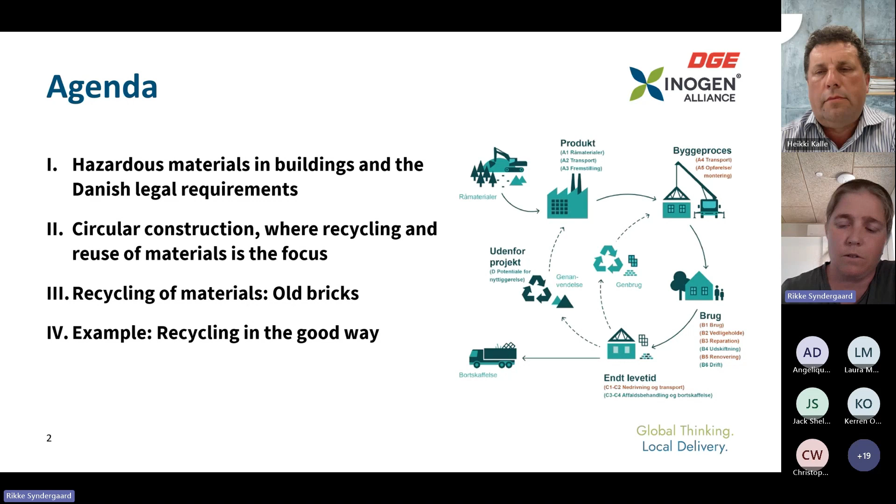Here in Denmark, in my personal opinion, and from what I hear from colleagues in other countries, Denmark is pretty good, up in front, in the investigation of hazardous materials. For normal projects, we check for PCB, 8 heavy metals, asbestos, PAH, hydrocarbons, and other substances in every project we have.

And along the way, we see that PFAS is a subject moving around in all the other areas we work with. We know it's there in the water along the Danish coastlines, and we know it's in the ground, but we also know it's in our building materials. So it's just a matter of time before we also start checking for that. My personal opinion is that we're just waiting for the Danish authorities to set limit values for PFAS so we can start checking it and put it into our reports.

Here in just 2023, we've experienced a really big focus on asbestos in our projects, because some people find asbestos in hidden materials, but also some people handle it quite wrong. When you handle it wrong, asbestos gets spread all around in the buildings and areas. It's a bad thing, because in the end, if you handle it wrong, you can die from breathing it in. But if you handle it right and get rid of it properly, asbestos isn't as big a problem as it could be.

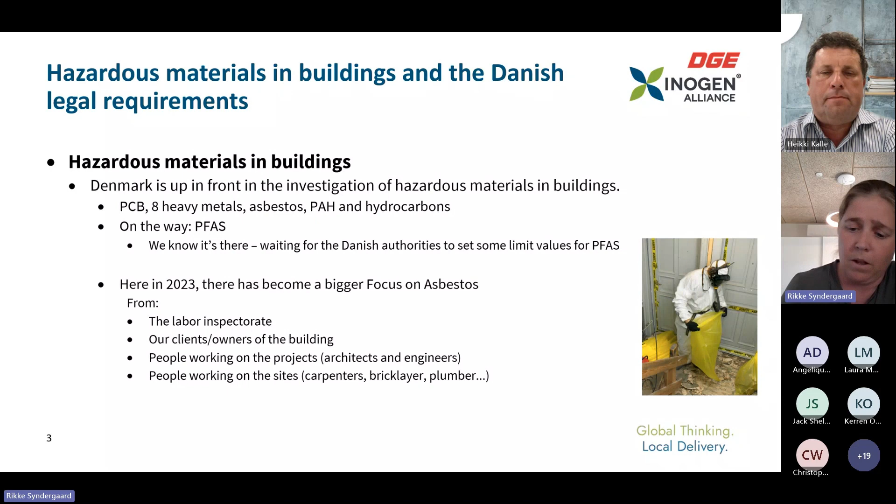Talking about Danish legal requirements, right now there's no direct legal requirements for circular constructions, which we're jumping over to now. But this year, the building regulations have set demands for carbon dioxide emissions calculations, where the demands set will increase the focus on recycling building materials in upcoming constructions and buildings. So there's no demand in legal requirements for reusing buildings, but because of trying to reduce carbon dioxide emissions, that will increase the demands for recycling materials. So one thing leads to the other, and hopefully that will end up being a good thing here in Denmark.

Right now we have ongoing research about reusing concrete, where people are researching, trying to crush down the old concrete and put it into new concrete, showing that it can be as good as new concrete made with raw materials from gravel pits.

People are making this research not only because we'd like to reuse concrete, but because it's a big need here in Denmark, since studies show that the Danish gravel pits will be empty of raw materials within the next 5 to 30 years, and the gravel pit nearest to Denmark's biggest city will be emptied first. So in 5 years' time, they're saying the gravel pits on the biggest island in Denmark will be emptied of raw materials. And that's a really bad thing.

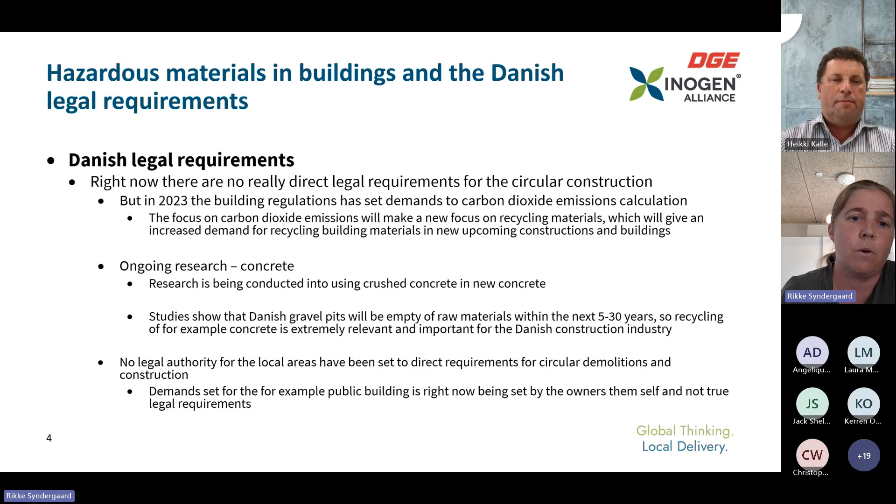So the owner makes the people bidding on projects describe what they're doing, for example with circular demolitions and how they're recycling materials. The better descriptions they make for the problems, the bigger score of points they get. So it's no longer just the price that matters, but also how they're reusing the materials.

Also here in Denmark, and I'm guessing you have this in other countries too, we have the DGNB building systems. It's a big topic in Denmark now, because it requires you to recycle and reuse a lot of materials—the more the better.

But you also have to make sure you don't drive too far away with your materials. For example, in DGNB buildings, there are demands that you're not allowed to drive more than 50 kilometers away with any waste. In big cities that's not a problem, but when you go out to the country, you really have to think about that, because suddenly 50 kilometers isn't such a big distance.

Also in the DGNB systems, they make sure buildings are controlled for example for PCB, heavy metals, and asbestos. The people checking for that have to be a third party—it can't be the building owners themselves or anybody involved in the project. There has to be somebody who doesn't have an active role in building it or in making that project.

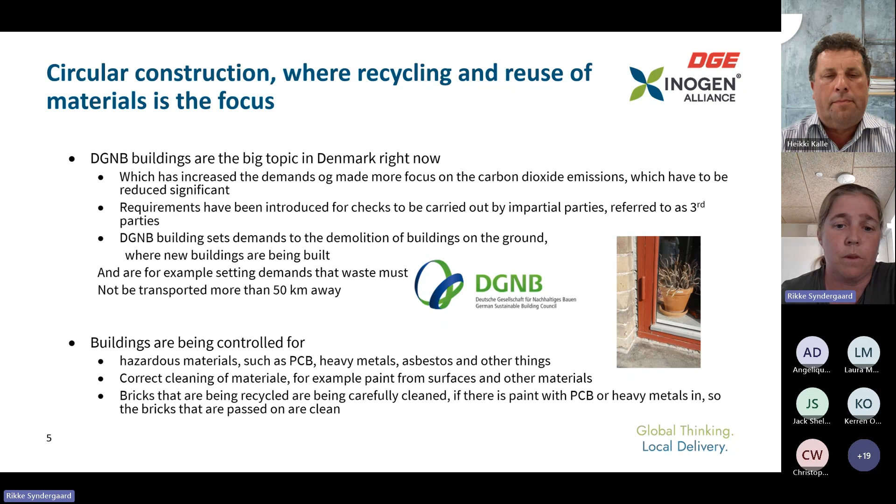Also in those projects, they try to recycle bricks if possible, and as far as possible we'd like to reuse things in the projects. If it's not possible in the correct project, you could reuse it in some other project. The more you reuse, the higher score of points you get, and in the end you can call your DGNB building a gold building or diamond building and stuff like that. That's good PR for the building owners, but also good for energy and health in the buildings.

Here in Denmark, we see a bit of a problem with recycling materials, where architects and engineers would like documentation on the durability of the materials, which can sometimes be difficult to present. Right now, CE labels exist for old bricks, so we can show documentation on those, but not yet on other materials. I know people are working on that, as well as on crushed concrete, because we need documentation so we can reuse it in new concrete and make sure it's good to put under our new buildings, so it lasts as long as possible.

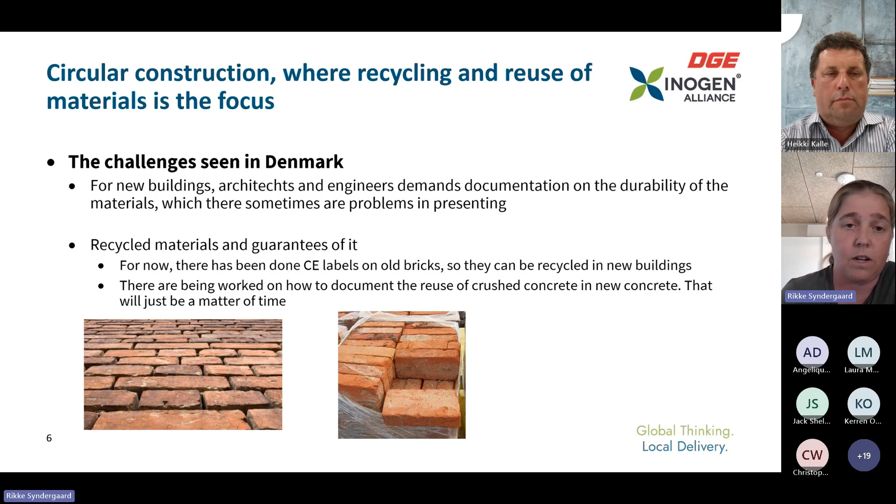Here in Denmark, we are really good at reusing old bricks, and we've been doing that for many years. People know it's possible to get old bricks and put them into new buildings. Also, in Denmark, new and old bricks often have the same size, so it's not a problem to use them in new buildings.

But before you reuse them, you have to make sure they're clean of PCBs and heavy metals that can be in the paint. As long as the bricks are clean, or are cleaned so there's no paint left on them, you can reuse them in the next building.

We've also recently started importing old German bricks to Denmark, which we use for outdoor material like flooring, walls, and similar things. I'm not sure if we only use it outdoors because of the German size being different from the Danish size, or because it's not suitable for indoor use, but I'm guessing it's just a size problem, since it can still be built into new buildings.

Then from the bricks, we also have a small island here in Denmark named Bornholm, where they've been recycling roof tiles for more than 20 years, which is tied to Bornholm's architecture. So when you take down an old building or roof, you have to make sure with the local authority that you take down all the small roof tiles, and the good ones you set aside so you can put them up on your own roof or someone else's.

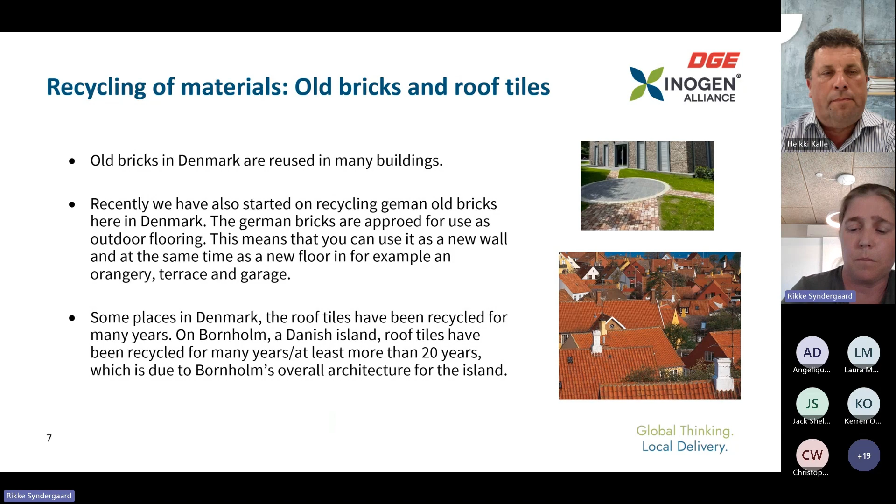Then we're going to go through some examples.

We've had projects here in Denmark where there was a mission house going for demolition, and all the bricks from that building were taken down carefully and cleaned off, then brought to another building in the local area where they had to build a new pub.

For the Danish humor, and there aren't so many Danish people here today, but the Danish humor is that it's funny, because in the mission house you don't drink, but in the pub you drink a lot.

The other good story is that it's good for health and the environment, because for every brick you reuse, you save half a kilo of carbon dioxide emissions. Also, the other bricks have been CE labeled, so you can document that they are almost as good as the new bricks you can buy in shops.

I'm guessing the next thing we'll see is that we'll try to recycle all the roof tiles that have no problems with them, taking them down carefully and putting them up on new houses.

But of course, you always have to be sure there's no hazardous materials in it.

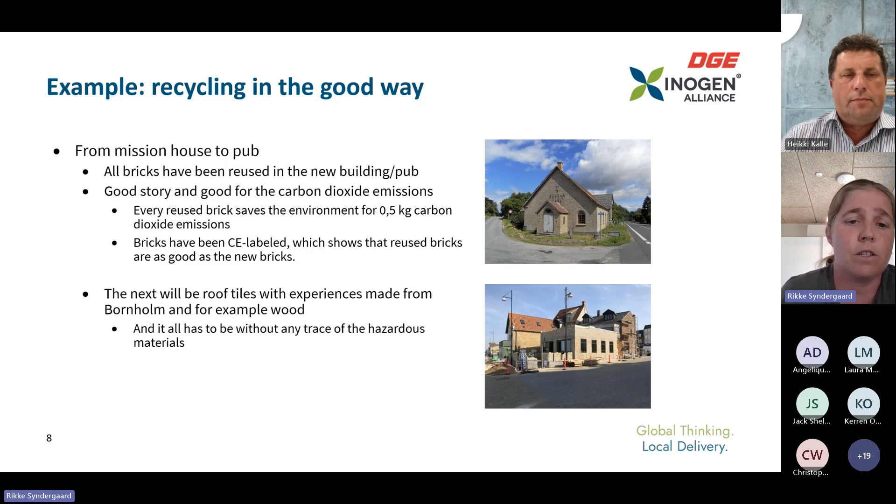The last example is from my local working area in Aarhus, the second biggest city in Denmark, where we had a hospital where we had to take down all the old bricks. They were transported to another local area where they had to build a new school, and around 400,000 bricks were recycled from the old hospital into the new school, saving over 200 tons of carbon dioxide. It's a good story to tell the small students in the school, but also good for showing that you can recycle materials and put them into new things, making sure you don't have to drive so far, as long as you get it into the projects in an early phase.

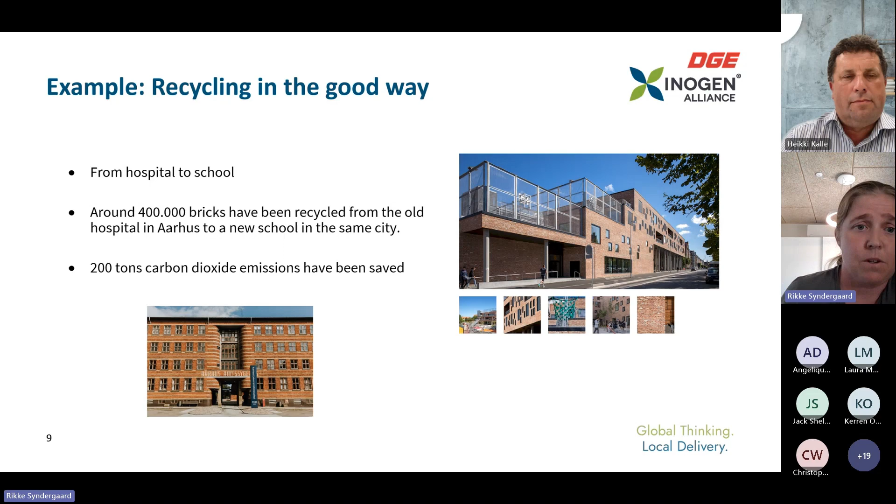That was the quick tour from here, and you're welcome to put questions in the end.

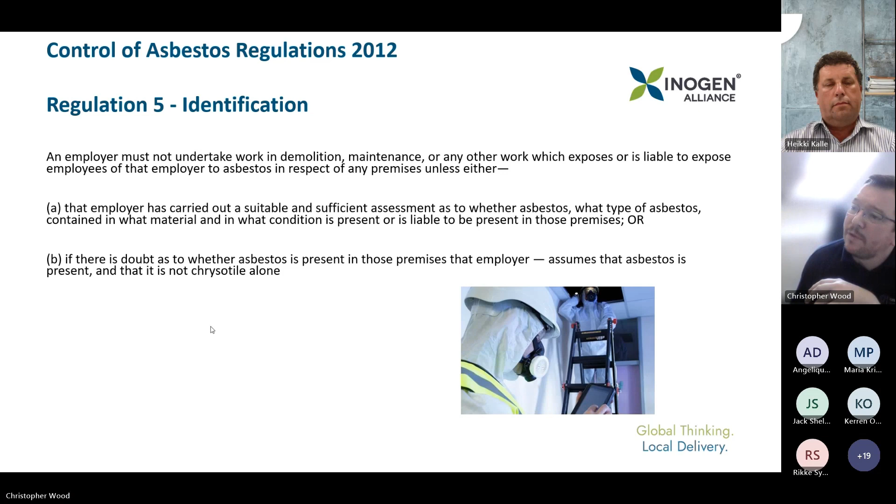So if we have asbestos and we identify asbestos, there is also a regulation, Regulation 16, that says we have a duty to prevent or reduce the spread of asbestos. So if you have asbestos within a building and you don't remove it and you just demolish that building, you will ultimately be spreading asbestos and in breach of this regulation, so we will be breaking the law. So what the law says here is that we need to prevent or reduce the spread. So the easiest way to do that is remove the asbestos prior to demolishing your building. If we remove the asbestos first, we're going to avoid spreading asbestos.

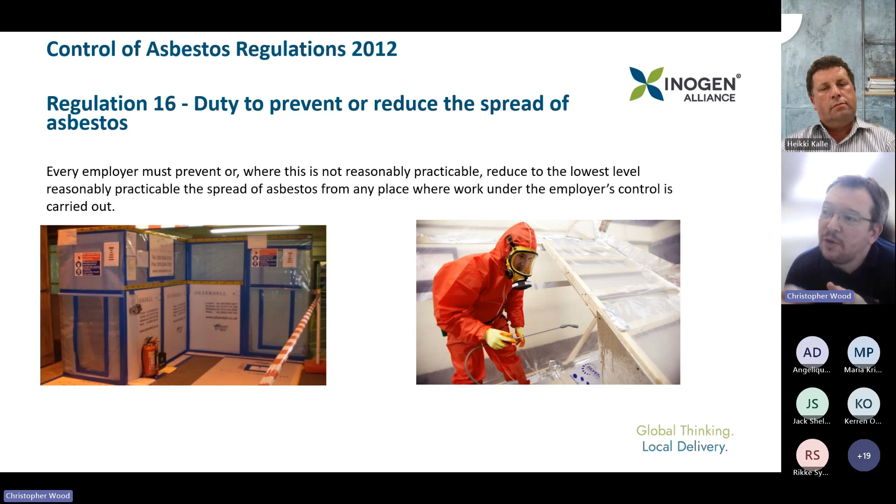That's in terms of very briefly on the control of asbestos regulations. I could talk about that all day, but we've only got a short window to talk about it here.

In terms of environmental and waste regulations, here in the UK we classify waste containing asbestos as hazardous waste if it has more than 0.1% asbestos within it. That 0.1%, however, relates to the asbestos within a piece of material. If that piece of material, let's say a piece of asbestos cement the size of my thumb with about 10% asbestos content, was in the back of a lorry full of crushed brick and concrete, that entire load would be classified as hazardous waste because you're unable to dilute it down. So until that piece was removed, the whole load would be classified as hazardous waste.

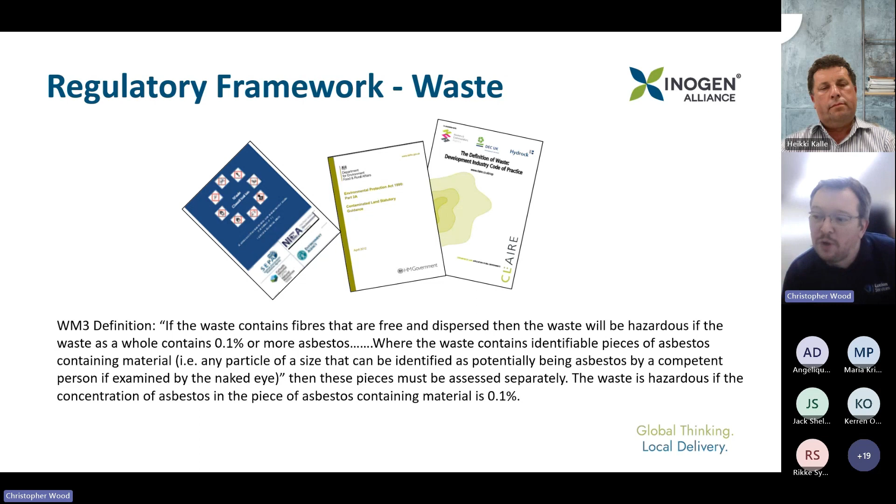In terms of what we could do with waste, particularly hazardous waste, we should follow this hierarchy. The number one thing we should be thinking about is trying to avoid having any waste whatsoever. But if we're going to demolish a building, we're ultimately going to have some waste. We can't change what we're doing, so we need to do something with it. If we can prepare it for reuse - checking and cleaning - so if we can clean it by removing the asbestos, then the remaining material may be able to be reused.

In terms of asbestos, we can't reuse it in the UK, and we can't recycle it or use it in any other way. Once it's reached the end of its life in a building and been removed, it has to be disposed of. Whilst there are some techniques to try and make it inert, pretty much 99.9% of all asbestos will ultimately end up being disposed of to hazardous waste landfill sites. So it is going to landfill, but with these asbestos materials, there isn't a great deal we can do with them at the moment.

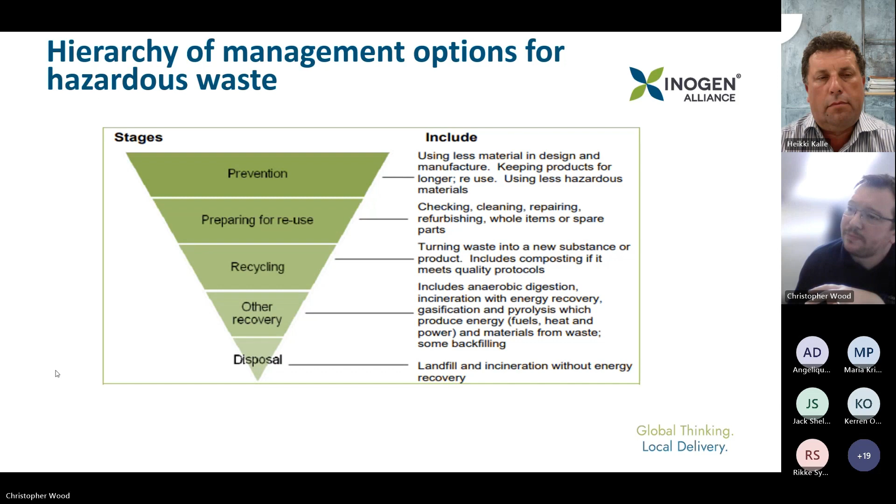You can't water it down with the rest of it. So if they were to remove all this as one big load, the entire load would be classified as hazardous waste. Therefore, it's going to get expensive to deal with because we can't reuse it - we're ultimately going to have to dispose of it to a specialist landfill site, potentially.

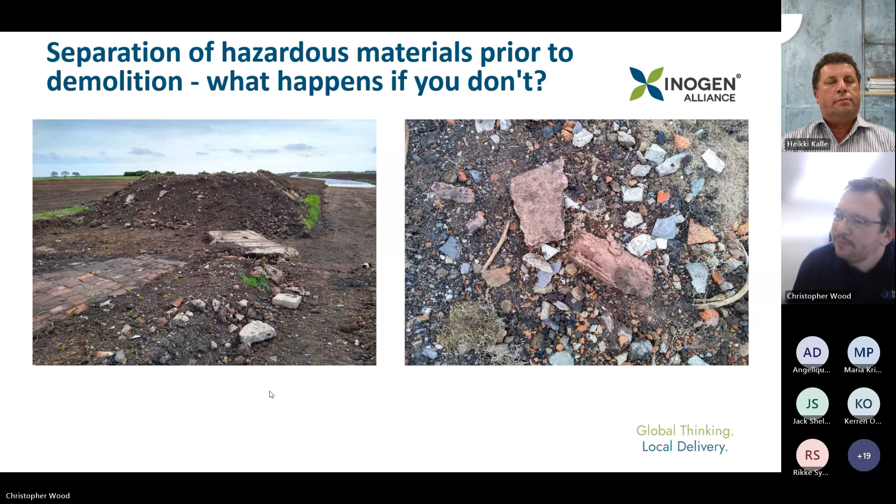We could try, if we have asbestos mixed in, to do a pick and separate it out. There are various techniques - on a small scale it may be practicable, but at large scale it just may not be practical to do so. That's where the entire load may end up going, or we may need to come up with a system to somehow retain it on site. Either way, we're into quite a lot of money here, whereas if it had been removed first it would have been easier. Once it's gone through a crusher, it's very hard to start trying to separate it.

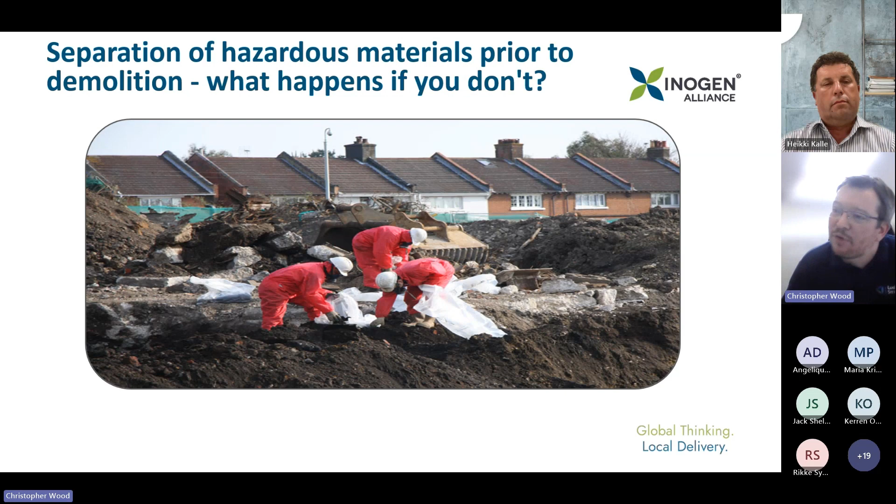Just a couple of examples of where it went wrong and where there's some good practice. The first one - a demolition project up in the northeast of England. On this project there was an in-ground obstruction, a concrete slab that the demolition contractor was breaking out and removing. They broke out this concrete slab, crushed it, and it was then spread around the site. Later down the line, somebody spotted some suspicious material on the ground, which was sampled and identified as asbestos. Lucion then did some more sampling regimes and determined that this was quite spread around the site. As part of the investigation process, it was basically assumed that this concrete they'd broken out had asbestos shuttering within it, but it wasn't identified at the time - only after it had been broken out, crushed, and spread over the site.

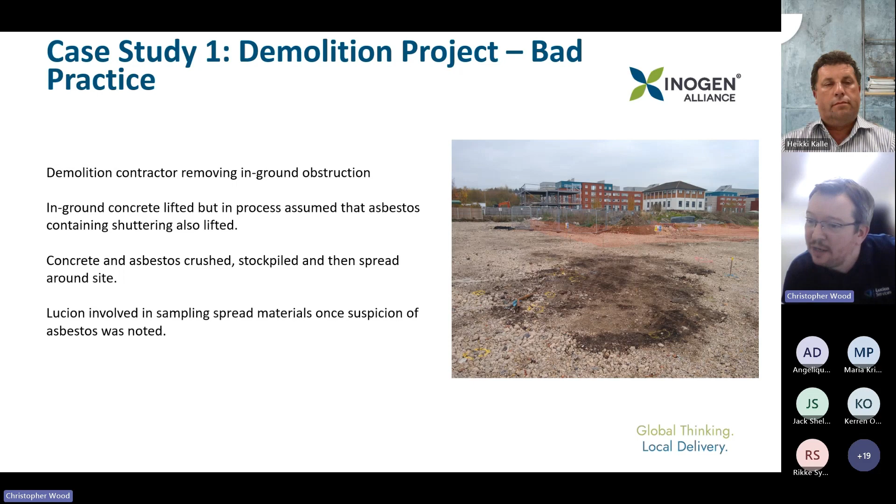Because it means spread, all the inert aggregates were now classified potentially as hazardous materials. So to start removing all this, if we can't separate it out, we're into millions and millions of pounds. So Delta-Simons were involved with coming up with a solution to try and avoid removing the material and retaining it on site, because you don't have to by default to start removing it all.

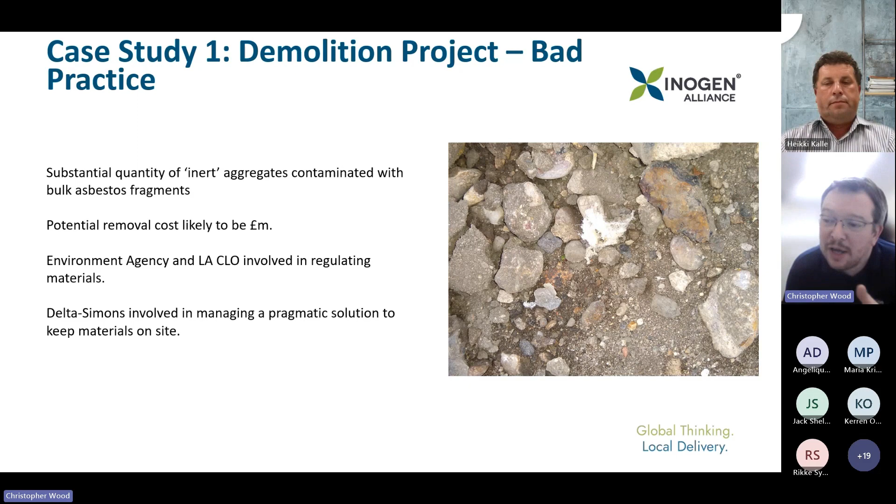We may be able to come up with a process to retain it, for example, keeping it on site and putting capping layers over the top. But that does involve a lot of liaison with our enforcement authorities, like our environment agencies and local authorities. So obviously it needs specialists to be able to come up with these ways of retaining it rather than spending all the money on disposing of it off site.

So in terms of the investigation, why it had gone wrong, well, ultimately the contractor carrying out the work didn't have adequate supervision in terms of breaking out this concrete. The staff on site actually had very limited knowledge of asbestos. It is a legal requirement in the UK under our asbestos regulations to provide information, instruction and training regarding asbestos if you were to potentially come across it as part of your working life in your job.

So these people hadn't had the required level of training. They also had very limited knowledge in terms of our quality protocols regarding aggregates being made from inert material having no asbestos within them, and also very limited knowledge generally regarding environmental regulations. So quite a key bit of this was just education for their staff in terms of asbestos knowledge, because had those contractors doing the initial breaking out had that knowledge of what asbestos looks like, then they may be able to stop at that point before they went too far and then ultimately spread it all over the site.

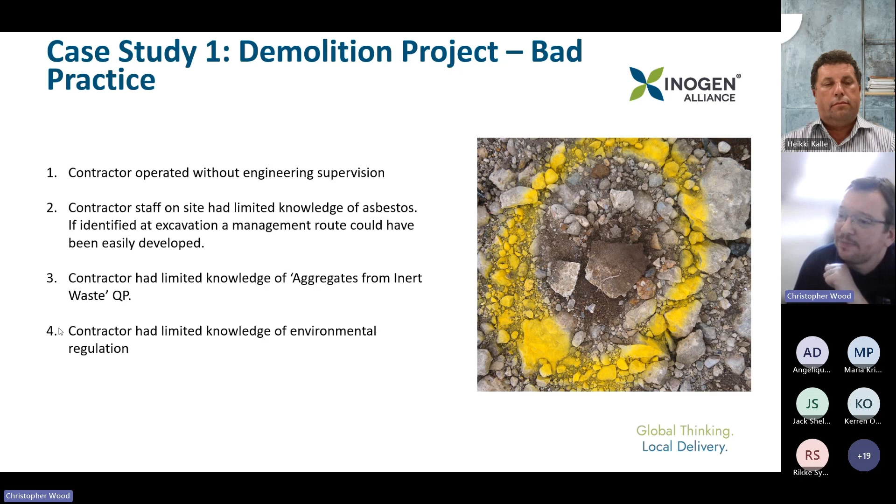That was a case of where it went wrong. Very briefly on some good practice on how it should be done correctly. So we have a project up here in the northwest of England this time.

So Lucion undertook a full demolition survey of this building. All asbestos which had been identified was then removed, and in this case it was removed by a licensed asbestos contractor. Again, that's another legal requirement in the UK. If you're working on high-risk asbestos materials that release a lot of asbestos fibres into the air, for example, spray coating, pipe laggings, fireproof boardings, insulation boards, those sort of things, then you need to hold a licence by the Enforcement Authority, the Health and Safety Executive, to work on those materials.

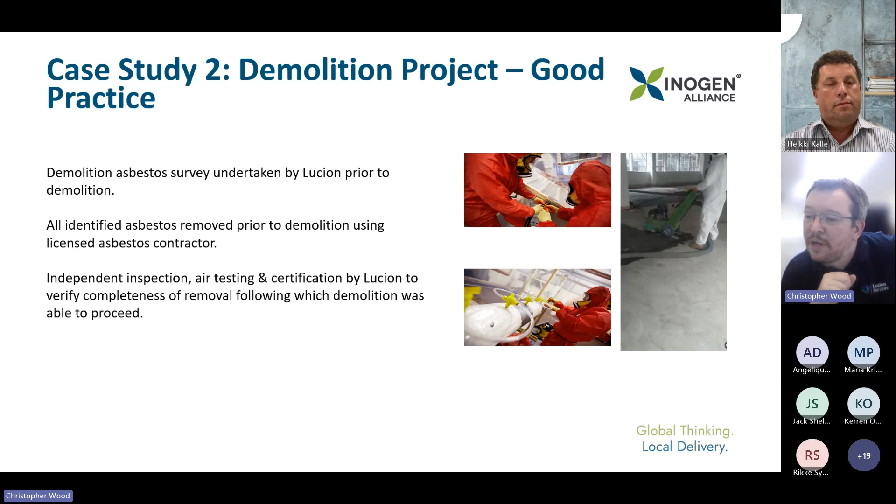And we also had some independent inspection carried out by Lucion. So separately from the asbestos contractor, we will do air tests and visual inspections and issue certification to verify that those areas are safe to reoccupy and to basically verify the completeness of the removal, that the asbestos had been removed. Therefore, demolition could proceed.

In this case, all the demolition operatives involved had undertaken asbestos awareness training. One of the key reasons why people do need asbestos awareness training, because even after a demolition asbestos survey, there still remains a residual risk. There may be some asbestos in the building that might not have been identified yet. Breaking out some concrete, then it may be uncovered. That may not be something that's uncovered in the survey. So education and awareness is really, really important.

The waste crushed material, the inert material, was tested for asbestos in accordance with its proposed use, in terms of whether it was going to be reused for aggregate, etc. So we kind of got a bad practice there where we've done it wrong. We've not identified it first, we've then spread it around the site. Whereas actually, if we do things correctly, we identify them, we separate it out prior to disturbance. We can then actually separate out the clean material from the hazardous material, and therefore avoid disposing of all of it as hazardous material.

So in terms of trying to promote some reuse, if we're making aggregate from inert crushed material, then we can't have asbestos in a product grade material. So we do already have quality protocols that state this. If people have got crushed material, it's much cheaper to be able to use it for aggregates than dispose of it as hazardous waste. So actually, if they spend the money removing asbestos first, they're not spending all that money disposing of all that what would have been inert material as asbestos waste. We don't always have to get rid of things.

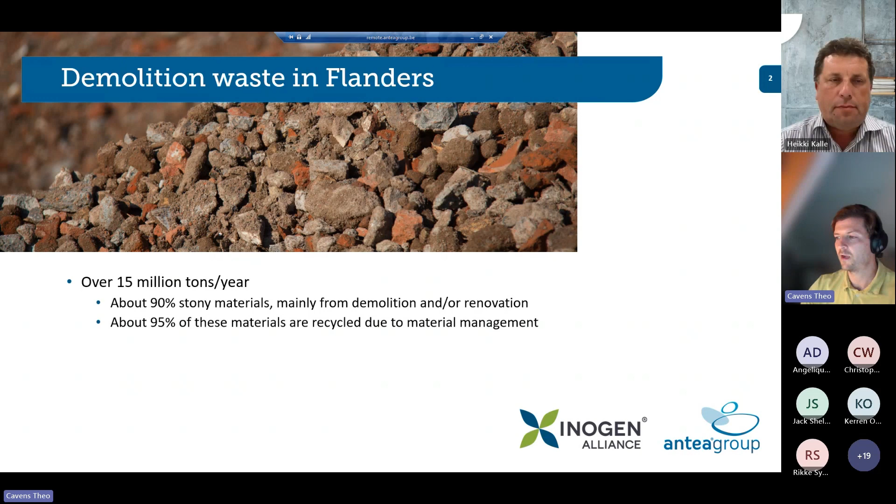Each year over 15 million tons of waste coming from demolition or renovation projects is produced, of which about 90% is stony materials, and about 95% of these materials are recycled due to material management.

But how did the material management and the current recycling process come to be? Well, it started off in approximately 1993 when the use of recycled granulates started.

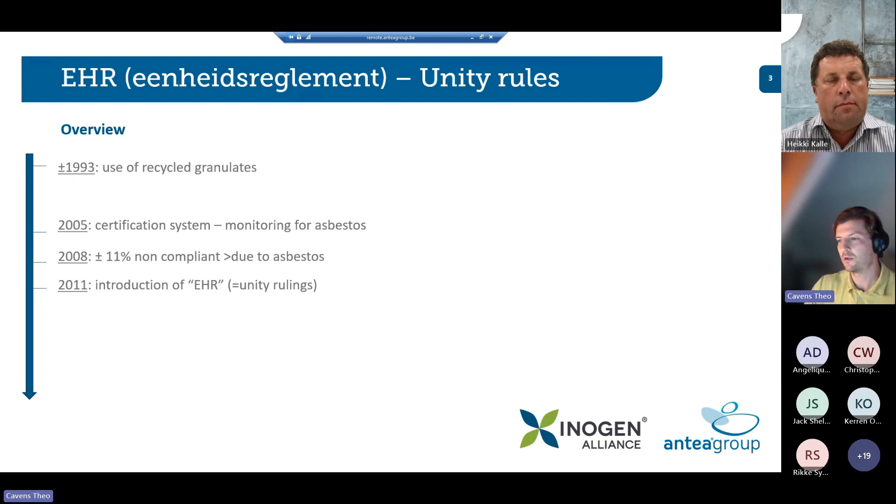In 2005, a certification system was introduced, mainly for monitoring asbestos. In 2008, a study showed that approximately 11% of the waste was non-compliant due to the presence of asbestos in the waste, which led to the introduction of EHR, a Flemish term standing for unity rulings.

Basically it comes down to certain requirements on the quality of granulates being included in the Flemish regulations on the reuse of materials. Because of this, the basic quality of granulates improved vastly, and it gained more trust to reuse recycled granulates as opposed to always reaching for new primary granulates.

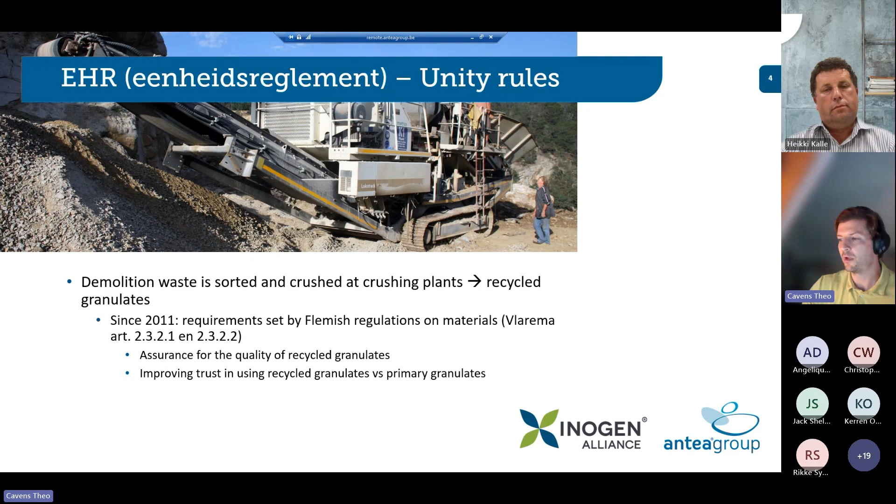A few years later, another study by OVAM, the Flemish Waste Authority, showed that 7% of the waste was still non-compliant due to asbestos. This led to a new approach of solving the problem at the source, which is done through the process of selective demolition.

Prior to demolition, all materials will be identified and inventoried, and during demolition, there's surveillance to ensure removal of waste happens in a correct manner.

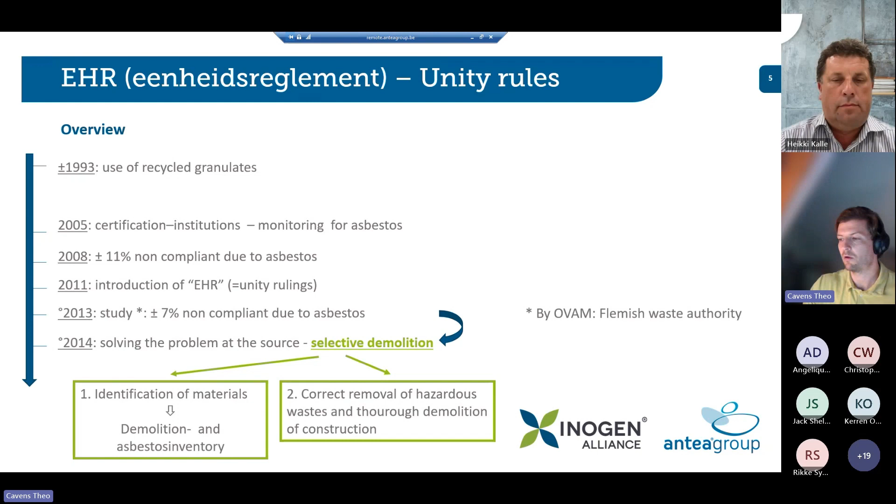With the process of selective demolition, two new concepts were introduced in Flanders: LMRP, which stands for Low Environmental Risk Stony Wastes, and HMRP, the High Environmental Risk Stony Wastes. The difference being the potential risk of the wastes on the environment.

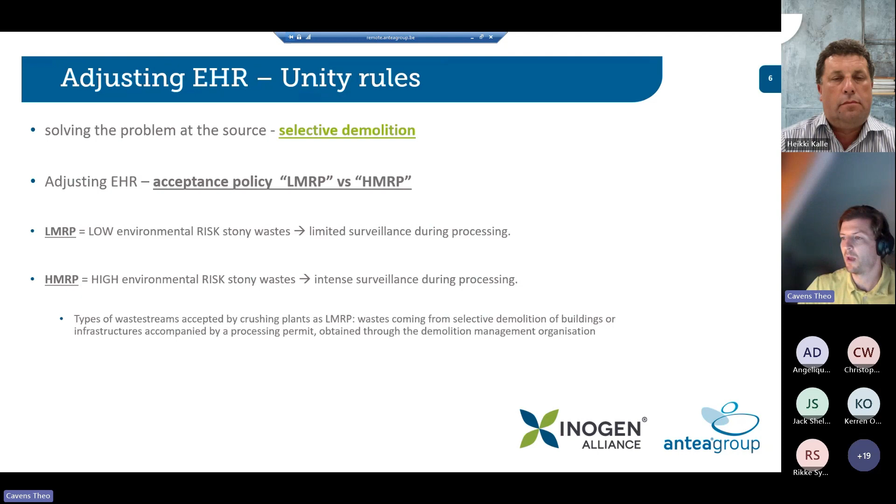Because the HMRP wastes have a higher potential risk, the processing cost at the crushing plant is much higher, as it's more closely followed. The LMRP label can only be obtained when the contractor is working in the correct manner, which I will explain in a minute.

To receive the LMRP label, the waste coming from a demolition project should be accompanied by a processing permit. This permit contains information on the type of waste, and through that, the crushing plant can decide whether the waste can be accepted as LMRP or HMRP.

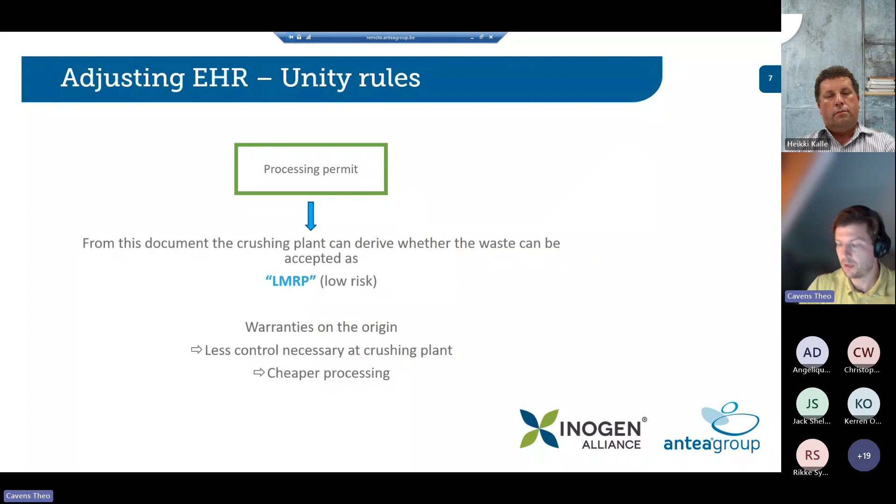To survey all of this, Tracimat was introduced in Flanders in 2014. Tracimat is essentially a demolition management organization, and its main task is to assure the quality of all the waste streams. They do that by surveying the SOP quality.

I will get to the SOP in a minute. This includes the correct removal of hazardous materials and the tracking of all materials. Through this procedure, they can guarantee higher quality input materials for crushing plants.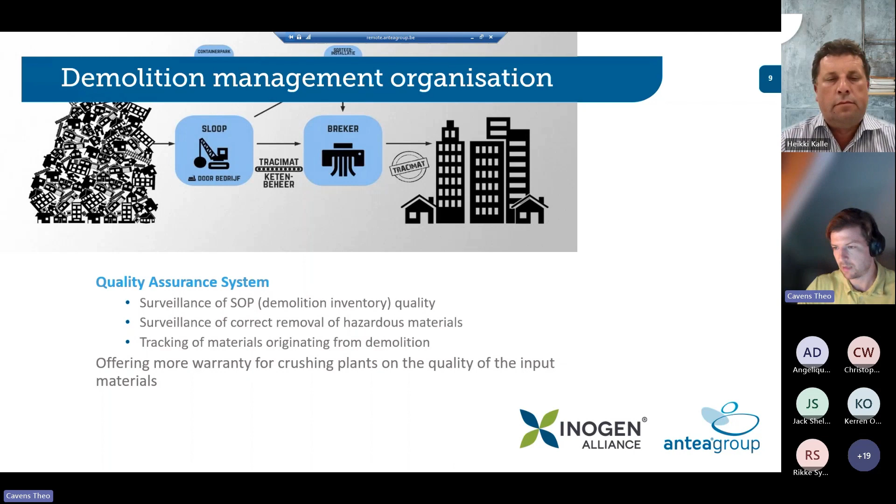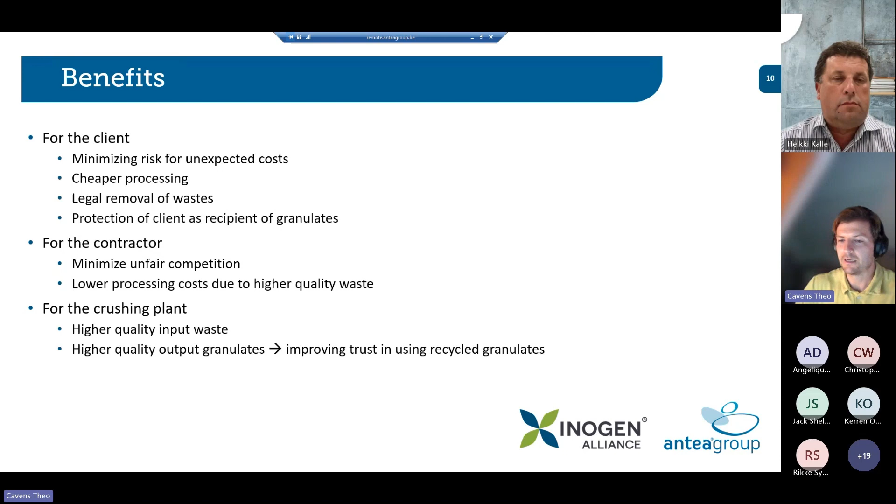This process has benefits for all of the stakeholders, mainly lower costs due to lower risk materials. Unexpected costs can be avoided, and there's a lower impact on the environment.

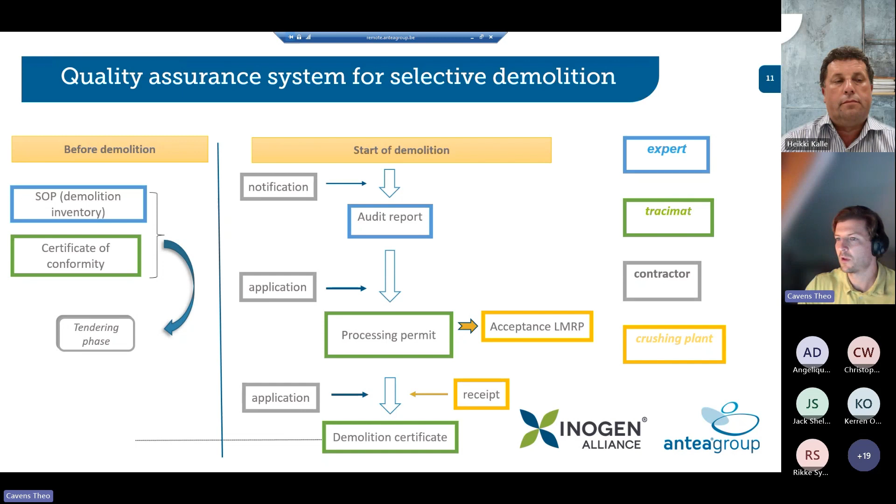Here you can see a brief recap of the whole process of selective demolition. A part of this process takes place before the actual demolition, shown on the left side of the blue line, and the other part takes place during or after the demolition works. The different colors in this scheme represent the different parties doing all the works. So first we'll take a look at the before-demolition part.

In the beginning, a SOP is made by an expert. The SOP expert is a neutral party, independent of the contractor. Most of the time, it's a consultancy agency. But what is a SOP?

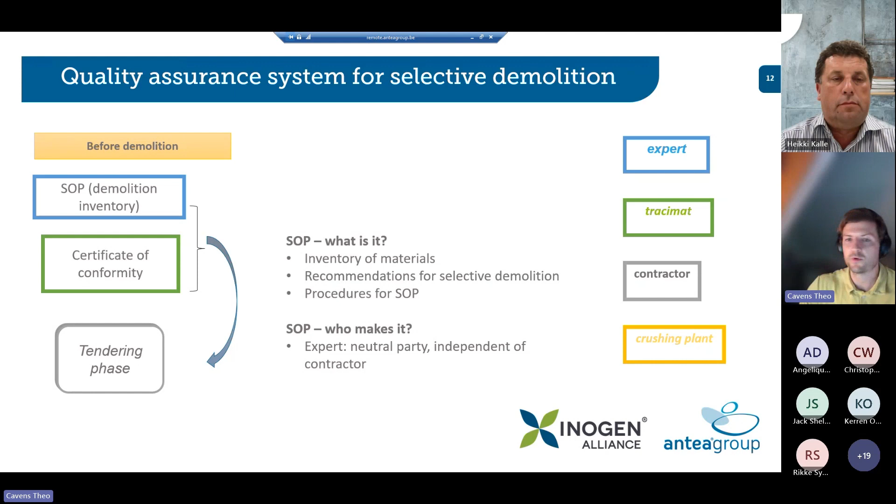It's a kind of report which contains an inventory of all materials expected to be released during the demolition of a building or structure. Also included are recommendations for selective demolitions. The expert needs to follow the standard procedures for making the SOP.

First, the inventory of all materials is a list of all types of materials that are expected. This means all types of materials, not just the hazardous ones, but also non-hazardous, from the substructures to the superstructures, and also the infrastructure.

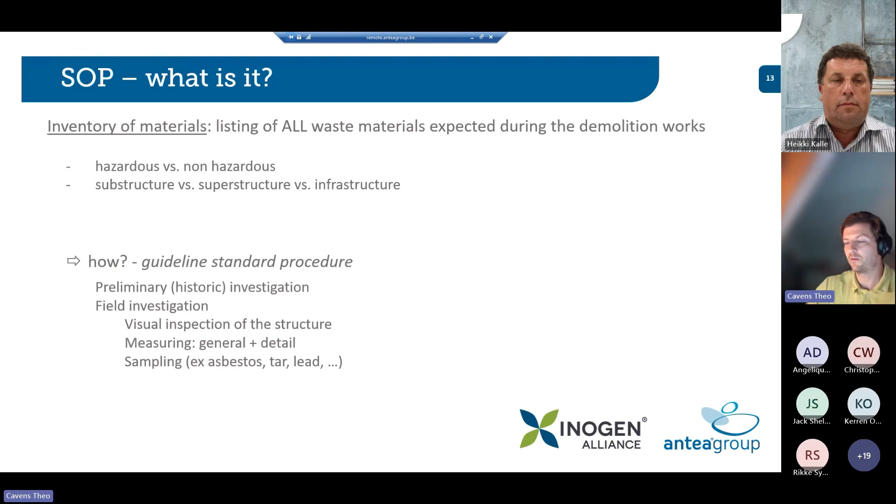The guidelines described in the standard procedure made by Tracimat should be followed. This contains a preliminary historic investigation, but also a field investigation with visual inspection of the structures, measuring of all the different materials, and the sampling of potentially hazardous materials.

The recommendations made in the SOP can be very general, but can also be quite site-specific. Some examples are the mandatory separation of different fractions of waste, but can also be removal techniques for asbestos or other hazardous materials, and

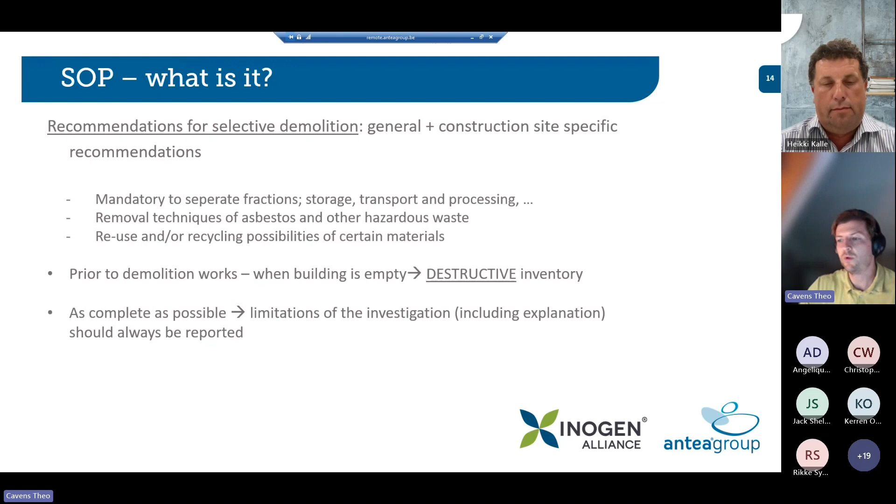certain recycling possibilities. As I said earlier, the SOP is made prior to demolition works and should be done as complete as possible. Any limitations on the investigation, closed rooms for example, should always be reported and explained.

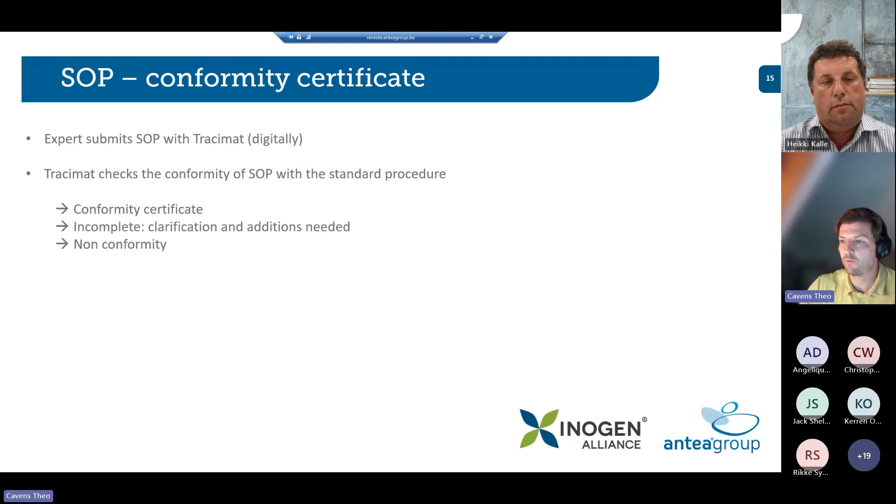When the SOP is finished, it's submitted with Tracimat. They check the conformity of the SOP with the standard procedures. And when they agree with the information, you get a conformity certificate from Tracimat, and the demolition works may begin.

Then the start of the demolition begins, and the contractor has to make sure that prior to the non-hazardous materials, all the asbestos and other potentially dangerous materials should be removed first and in a correct manner.

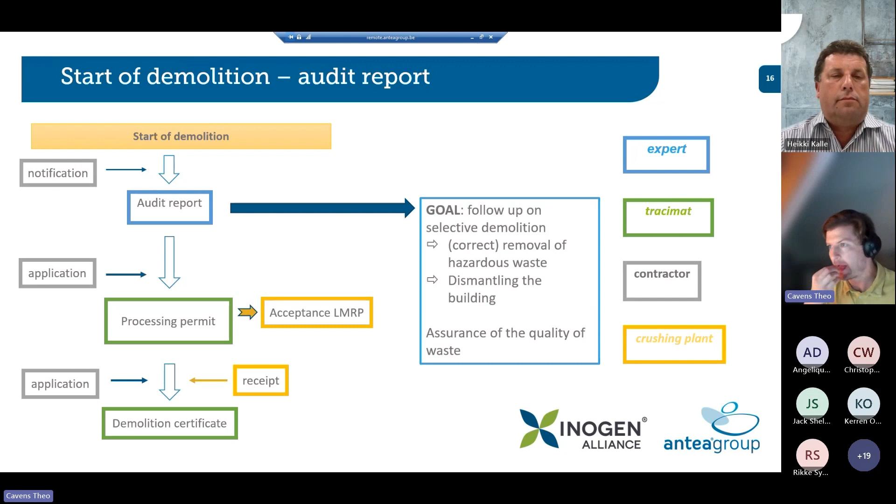When that is done, the expert is again notified, and an audit is executed. The expert then makes an audit report where the process is described.

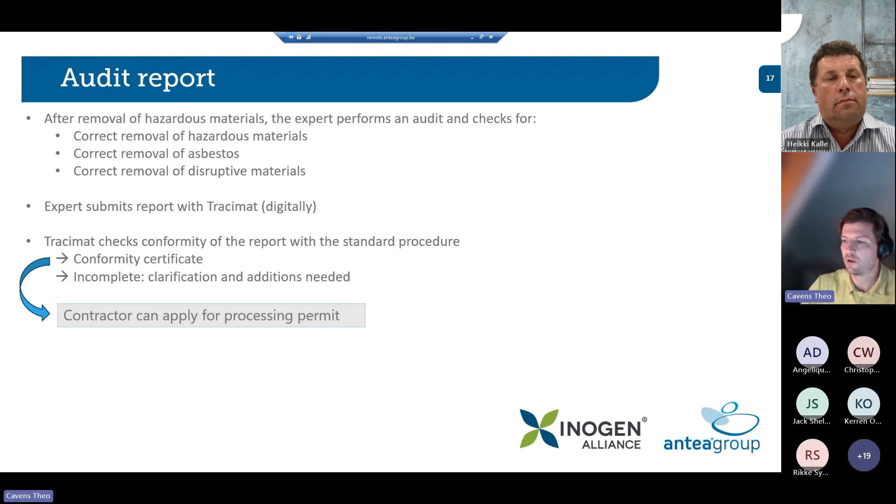Again, this report is submitted with Tracimat. They check the conformity of the report and whether the contractor followed the rules. And if so, then a new conformity certificate is delivered. With this new conformity certificate, the contractor can apply for the earlier mentioned processing permit.

Then the waste accompanied by the processing permit is sent off to the crushing plant. The crushing plant can then decide whether it can be accepted as a low environmental risk stony waste or not.

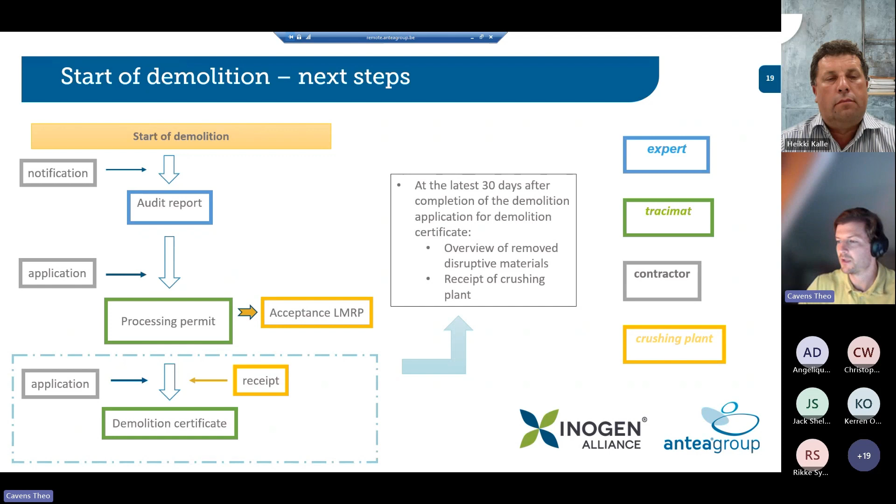And at the end of the whole process, the contractor receives a demolition certificate with all the information of the materials and the amounts, which he can then show to the owner of the building to prove that the process has been followed and everything was done in a correct fashion.

Then I will give a brief example of some of the forms from a SOP. This is a small case in which we made a SOP for an office building in the city center of Antwerp, which contained a few shops also.

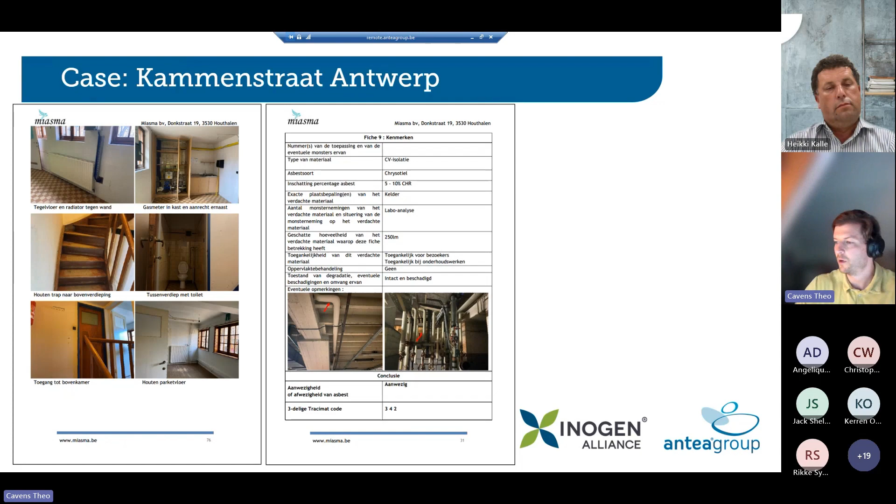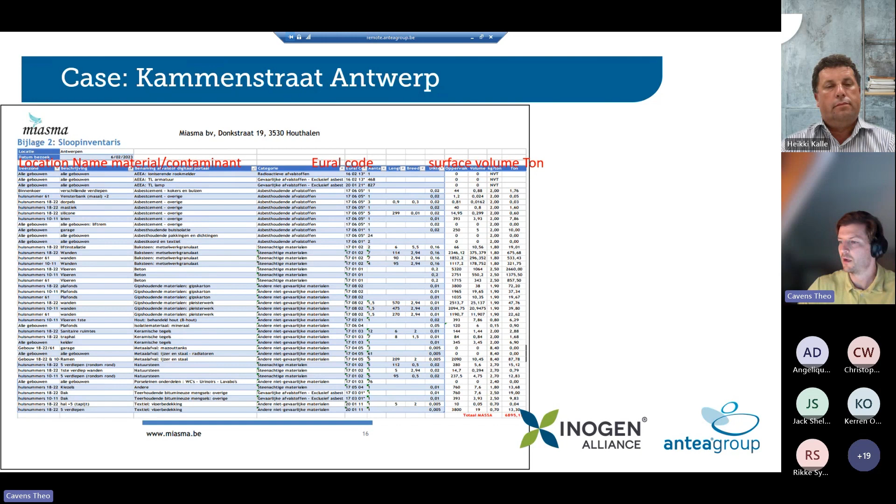And this is an example of an inventory with a listing of all different materials and the location in the construction. Every type of material gets a certain code, and an estimation is also made of the quantities of the different materials.

So yeah, thank you. That was all for my presentation. If there are any questions, feel free to ask.